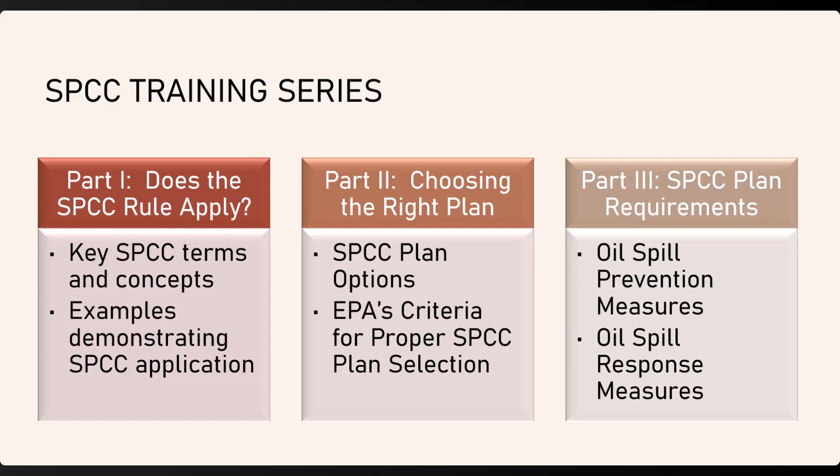It should be noted that much of the material presented here was taken from an EPA reference written for its inspectors. This document, which is referenced throughout this course, is free for download and is recommended for anyone needing periodic guidance to help ensure SPCC compliance.

In addition to this guidance, I've relied on my personal experience in developing SPCC plans for all types of facilities, including small businesses having a few oil containers, electric utilities with hundreds of SPCC regulated transformers, facilities with over 1 million gallons oil storage requiring, in addition to SPCC, a facility response plan, and inclusion of the SPCC requirements into EPA's integrated contingency plan model that can be used not only for SPCC plan compliance, but also compliance with several other programs, all written into one document.

So let's start this discussion with, what is the SPCC rule? SPCC is an Environmental Protection Agency program that is authorized by the Clean Water Act. The SPCC regulation is found specifically at Title 40 of the Code of Federal Regulations, Part 112, or simply 40 CFR Part 112. This regulation was initially published in 1973 and has been modified substantially since that time.

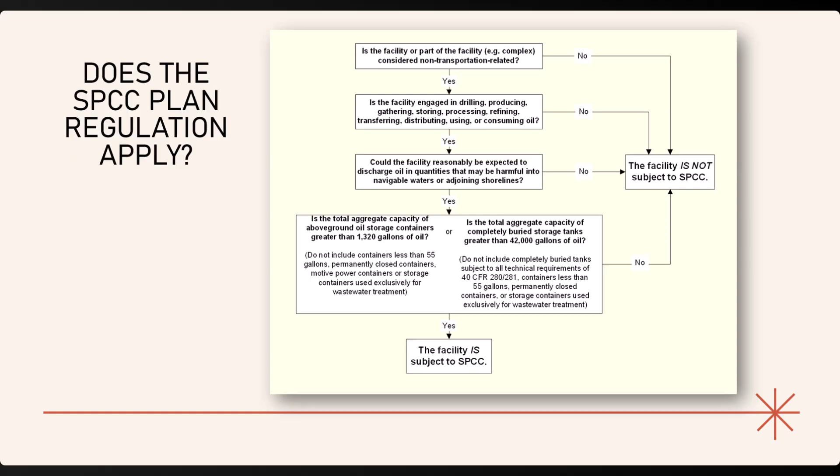Lastly, if you've made it this far, you must calculate how much oil you have to see if the facility exceeds the threshold quantities of 1,320 gallons of oil in above-ground containers or 42,000 gallons underground. If either of those quantities are exceeded, congratulations, it looks like you're regulated under SPCC.

Taking the EPA decision chart, you can distill this question of applicability into a single question as follows. Can the oil-containing non-transportation related facility that is involved in regulated activities with an oil capacity totaling more than 1,320 gallons for an above-ground tank or 42,000 gallons for underground, due to its location, reasonably be expected to discharge oil in harmful quantities to navigable waters or adjoining shorelines?

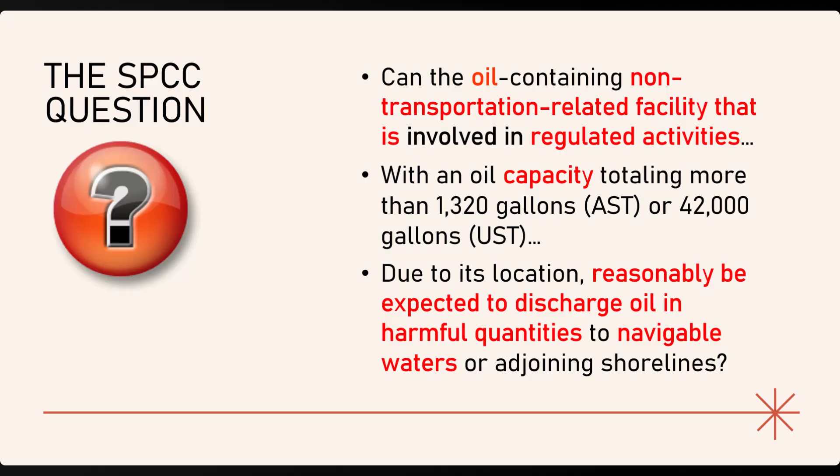The words highlighted in red are those words that are unique to SPCC and require an accurate explanation to answer the question. You simply cannot use Webster's Dictionary to interpret this question. The following sections will explain these terms and concepts and provide examples for clarity. This section will address the first two determinations from the EPA flowchart to help answer the question, is the facility non-transportation related and engaged in regulated activities?

The key terms and concepts to be covered in the slides that follow include the definition of oil, regulated activities, definition of a facility, including defining the facility boundaries, oil container and the different types of containers, the definition of harmful discharge of oil, and lastly, the definition of navigable water.

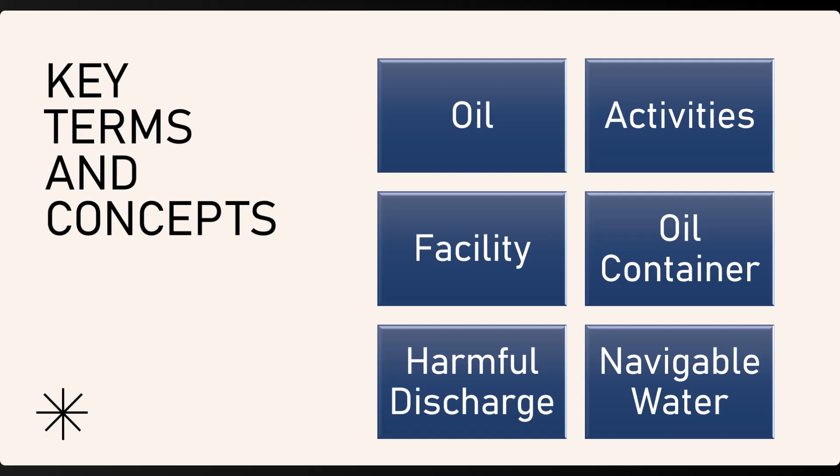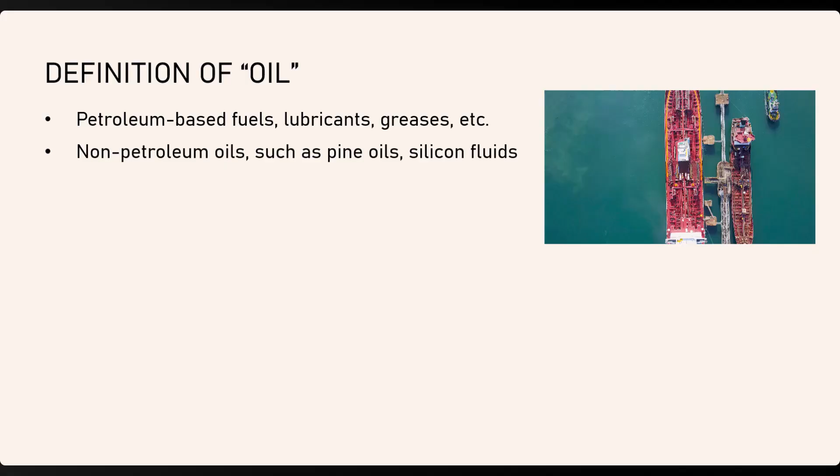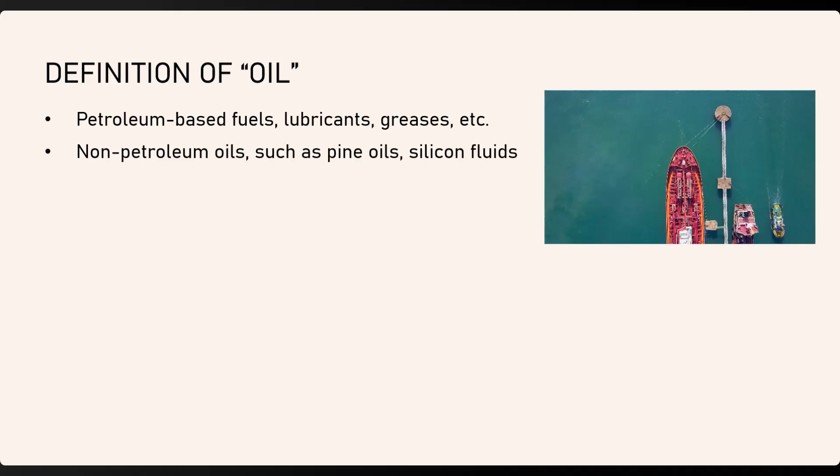Under SPCC, oil means oil of any kind or in any form. This definition includes what you would expect, namely petroleum-based oils such as diesel fuel, lubricants, and mineral oils. The rule also applies to asphalt derivatives such as emulsions, but not hot mix asphalt mixed with aggregate. The definition includes non-petroleum derived oils such as pine oils and silicon fluids. The definition includes synthetic fluids such as heat transfer fluids, hydraulic fluids, transmission fluids, and other synthetic oils.

In response to the Edible Oil Regulatory Reform Act of 1995, vegetable oils and animal fats were added to the definition. Examples of vegetable oils include corn oil, coconut oil, and peanut oil. Animal-derived oils include fish oil, lard, and tallow. Biodiesel and biodiesel blends are regulated.

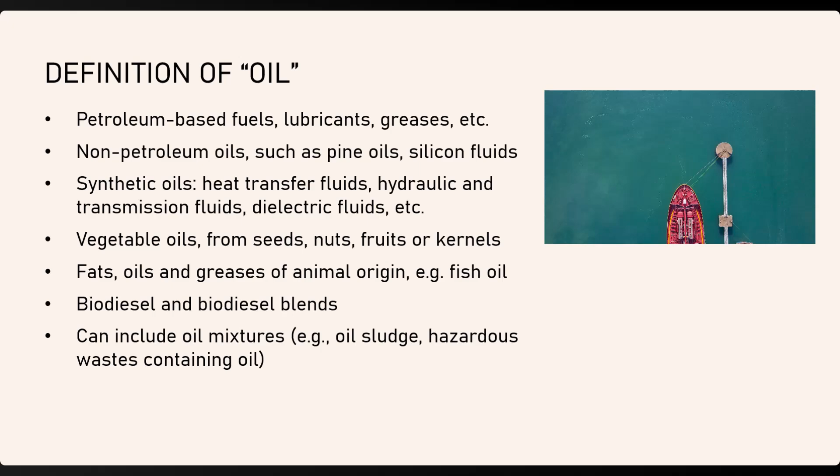Oil mixtures are included, such as oil and water or oil mixed with hazardous waste. If the mixture does not contain oil, it is not SPCC but could be regulated under a different EPA program. There is some nuance involved, so be careful. For example, natural gas and liquid petroleum gas is exempt from the definition. However, natural gas liquid condensate is covered by the rule. All this is to say, if you have a liquid related to any of these categories, you might be covered by SPCC. If in doubt, consult the EPA's SPCC Guidance Manual.

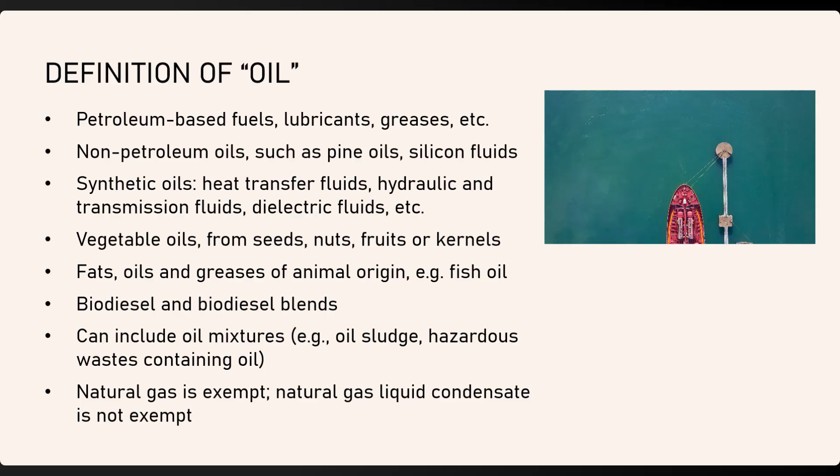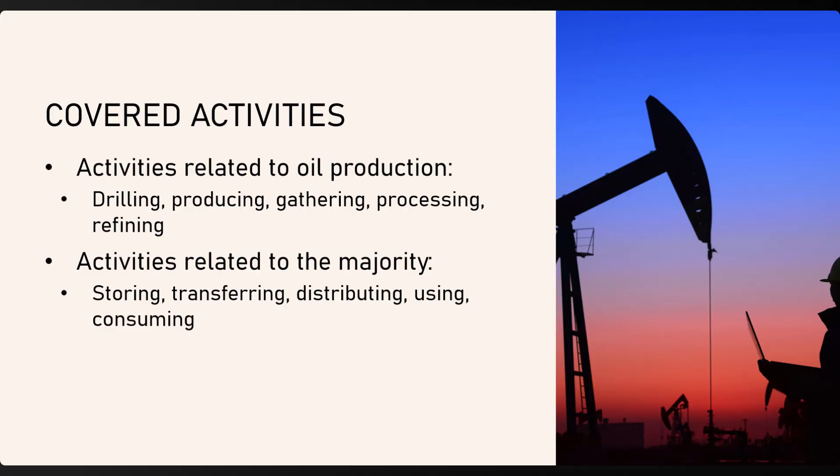The activities that trigger SPCC coverage are broken out here into two categories. First, there are those activities that relate to oil production and include such things as drilling, producing, gathering, processing, and refining. As you might guess, the ways in which the SPCC rules apply to oil production are numerous and complex. A thorough analysis of oil production and SPCC are beyond the scope of this course. Then there are those activities that apply to most facilities with oil. Those activities are storing, transferring, distributing, using, and consuming. There is not a lot of confusion involved here. If you have oil at your site, you are likely engaged in one or more of these activities.

Now let's discuss one of the most critical terms, facility. It's easy to think of a facility as being a site, like an address. That is not correct. A single site might have several facilities for SPCC determination. The definition of facility governs the overall applicability under SPCC. For example, how you define a facility determines how you calculate the amount of oil at that facility. Also, the location of a facility is used to judge whether you have the potential to discharge oil to a navigable water. One of the most important characteristics of a facility is its boundary.

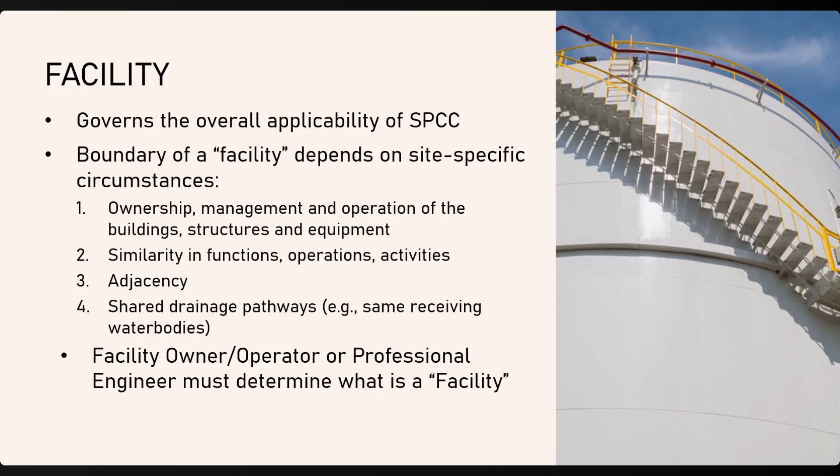The boundary or extent of a facility depends on site-specific circumstances. Factors that may be considered relevant in delineating the boundaries of a facility include, but are not limited to, the following: ownership, management, and operation of buildings, structures, and equipment, similarity in functions, operations, or activities, adjacency, and lastly, shared drainage pathways, that is, same receiving water bodies. The facility owner-operator, or the professional engineer acting on their behalf, must make a judgment as to what constitutes a facility. The next couple of slides illustrate this concept of setting the boundaries for a facility.

This boundary concept is best explained by example, one taken from EPA's guidance manual. Let's say a farmer has one central fueling location and 10 separate tracts of land. The central fueling location has several oil containers with an aggregate storage capacity of 5,000 U.S. gallons for diesel fuel, gasoline, and hydraulic lubrication oils. Each tract has one 1,000-gallon above-ground container of diesel fuel used for fueling only the equipment operated on the tract. The tracts are located such that the containers are each several miles from each other. Each tract produces various types of crops, and thus the equipment is operated seasonally according to the crop type and irrigation needs. What might be the determination of facility boundaries in this situation?

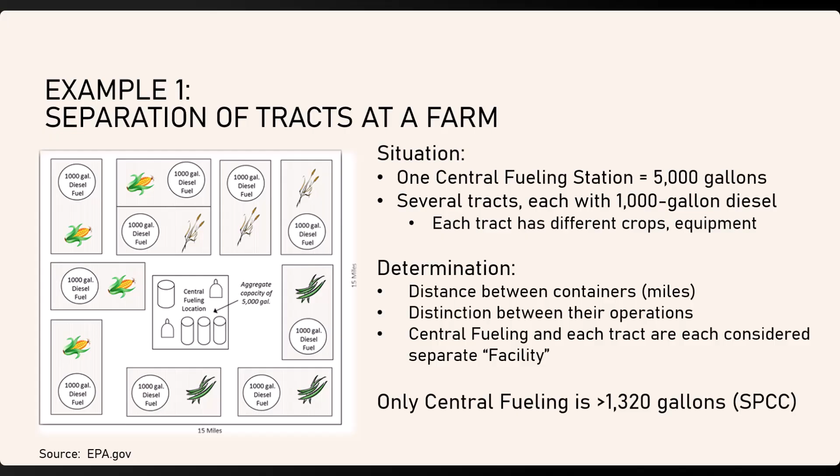Given the distance between containers and the clear distinction between the operations that they support, each tract and the central fueling location can be considered a separate facility for purposes of calculating oil storage capacity and determining the applicability of the SPCC rule. In this example, each tract does not individually meet the above-ground storage capacity threshold for applicability of the SPCC rule. That is, it doesn't exceed 1,320 gallons. Therefore, no SPCC plan is required for these tracts. Only the central fueling at 5,000 gallons exceeds the threshold. However, the farmer might choose to include the other diesel containers to provide oil prevention measures for the entire site.

Let's discuss just a few other examples because this concept of facility boundary is so important. Let's say you have first 10 drums of lube oil in a shed and a 1,000-gallon equipment above-ground tank used for maintenance, located 50 yards away. Is this a single boundary? It's likely. Why? Because they are located close together, that is, adjacent. They have the same owner, the same maintenance operation, and likely have similar drainage patterns.

Let's say you have equipment reservoirs in a powerhouse totaling 2,500 gallons aggregate. Single boundary? Likely. Again, because of the same location, same function, probably the same operators, in the same indoor drainage areas.

What about a 1,000-gallon diesel tank for equipment at a mine site, and then you have a 1,200-gallon diesel tank at another mine site a mile away? Is this a single boundary for a facility? Maybe, maybe not. Maybe because you have the same owners, the same function, and the same activity being performed. However, maybe not, because there is a large distance between them and they possibly impact different navigable waters.

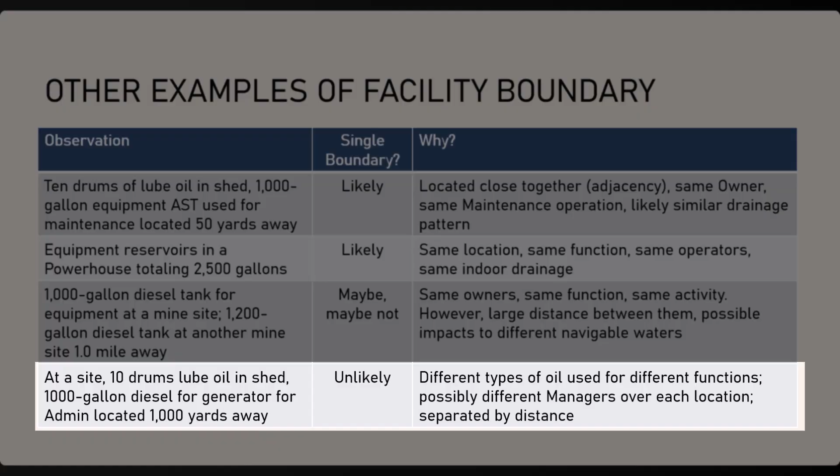A word of caution on defining facility boundaries. EPA says that an owner or operator may not characterize a facility boundary to avoid applicability of the rule. The issue of EPA looking at your boundaries might come up if you were to report an oil spill and EPA starts questioning why you do not have an SPCC plan. Examples of trying to avoid regulation might include the following.

You claim to have similar facilities that are separate, but they are actually located adjacent or in close proximity to one another. You determine that oils in the same location are not counted together because they are different products coming from different suppliers. Or finally, you claim that similar facilities drain to different stormwater areas on the site, but actually these areas eventually drain to the same drainage ditches and impact the same water body. These examples demonstrate the need for a qualified person to make the judgment as to what facilities are present.

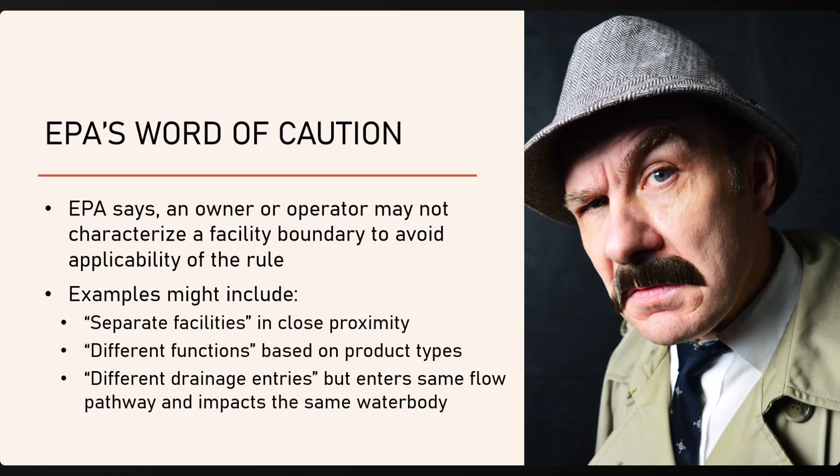Facilities regulated under 40 CFR Part 112 are divided into three categories: transportation-related facilities, non-transportation-related facilities, and complexes. A complex means a facility that has both transportation-related and non-transportation-related components and is therefore subject to more than one federal agency. A memorandum of understanding between EPA and the Department of Transportation, or DOT, clarifies the types of facilities, activities, equipment, and vessels that fall under the terms transportation-related onshore and offshore facilities and non-transportation-related onshore and offshore facilities.

DOT-regulated transportation facilities are exempt from SPCC. Examples of DOT-regulated facilities include highway vehicles and railroad cars used for oil transport, interstate and intrastate piping systems, and terminal facilities such as transfer hoses and loading arms used to transfer oil in bulk to vessels.

Examples of non-transportation related facilities that come under SPCC include fixed or mobile onshore and offshore facilities, facilities that use and store oil, loading racks, transfer hoses used to transfer oil in bulk to and from highway vehicles and railroad cars, and lastly, highway vehicles, railroad cars, and pipelines used to transfer oil exclusively within the confines of a non-transportation related facility, such as a fueling vehicle used exclusively at an airport.

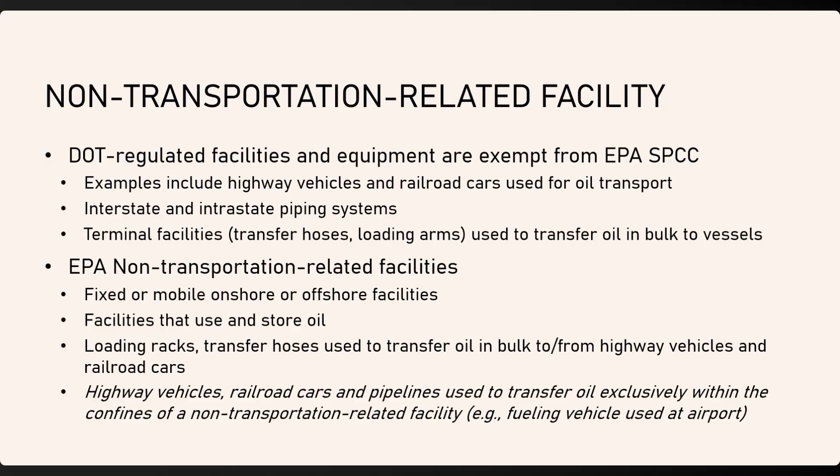Now that we've covered the steps to identify a facility, it's time to focus on how to sum up the capacity of oil being stored at that facility. The questions that must be answered are, is the total aggregate capacity of above-ground oil storage containers greater than 1,320 gallons of oil? Or is the total aggregate capacity of completely buried storage tanks greater than 42,000 gallons of oil?

The amount of oil at a facility is based on the capacity of oil storage containers. There are certain definitions that must be known in order to do this, along with SPCC rules on counting. This section will cover those terms and concepts.

Knowing whether a facility is regulated depends on the amount of oil in the oil storage containers. Under SPCC, there are two basic types of oil storage containers: bulk storage containers and oil-filled equipment. Bulk storage containers means any container used to store oil. These containers are used for purposes including but not limited to the storage of oil prior to use, while being used, or prior to further distribution in commerce. Examples of bulk oil storage are drums, totes, and tanks, either above ground or underground.

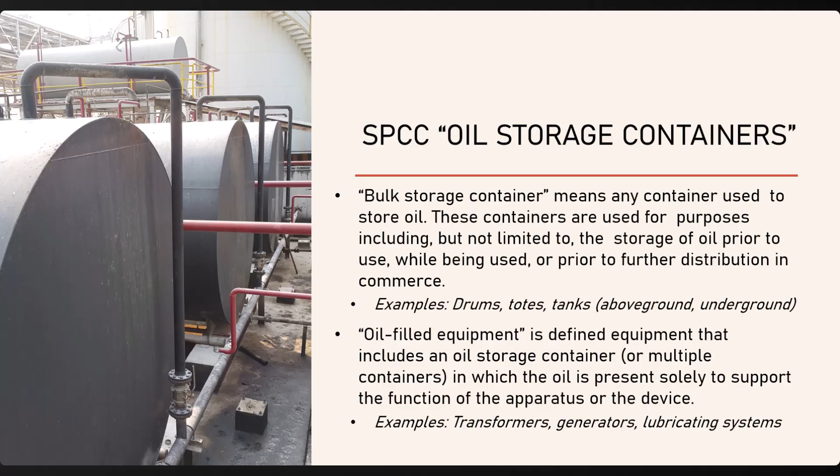If you have an underground tank at your facility, it's worth fully understanding how it might be regulated. SPCC regulates completely buried tanks. This means any container completely below grade and covered with earth, sand, gravel, asphalt, or other material. Containers in vaults, bunkered tanks, or partially buried tanks are considered above-ground storage containers for purposes of SPCC. This can be very significant because if a tank is not completely buried or in a vault, then the SPCC threshold drops to the above-ground tank regulated amount of 1,320 gallons rather than the 42,000 gallons amount that applies to completely buried tanks.

It should be noted that completely buried tanks that are subject to the federal or state UST rules are exempt from SPCC. That is why typical gas stations are not SPCC regulated. However, any underground tank that is not regulated by a federal or state rule is in turn subject to SPCC. An example of this is a buried tank that is less than 110 gallons capacity, the cutoff for UST regulation.

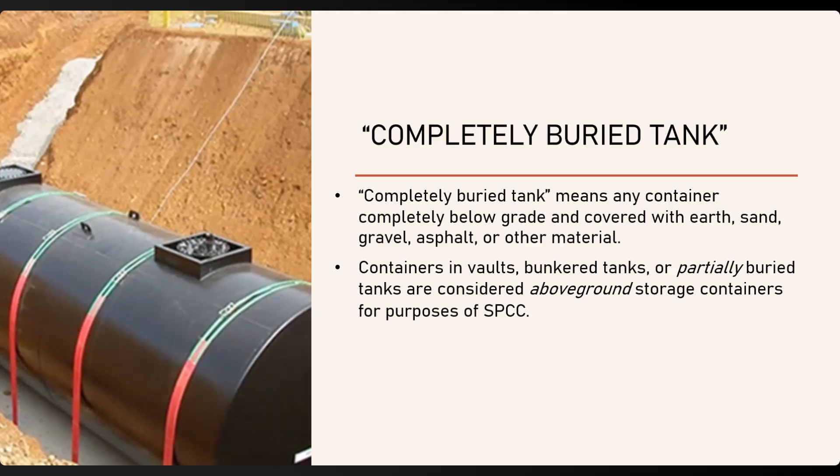Another example might be an emergency spill and overflow tank that is expeditiously emptied after use. Again, this tank is not regulated under the UST rules, and therefore it is subject to SPCC. The SPCC Guidance Manual has a list of completely buried tanks that are exempt from the UST rules and therefore might be considered for SPCC.

There are certain SPCC rules that govern how you count the oil at a particular facility. Number one, you need to identify what oil storage containers are present at a facility that are subject to SPCC. That is, they are not exempt or those containers are not permanently closed. Now, permanently closed means that the tank meets the conditions for closed as defined in the SPCC rule. It involves much more than just claiming that you are no longer using the tank, even if you empty that tank of its contents. Number two, consider every container with a shell capacity of 55 gallons or more.

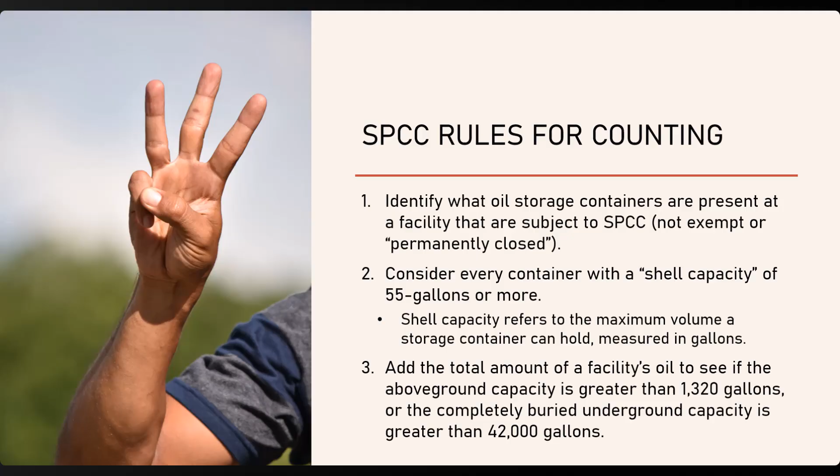Shell capacity refers to the maximum volume a storage container can hold, measured in gallons. In other words, don't count the amount in the container or typically kept in the container. Count the maximum, the shell capacity. Note that the SPCC guidance provides information on how a container's shell capacity can be re-rated to reduce the volume needed to be counted. Number three, add the total amount of the facility's oil to see if the above-ground capacity is greater than 1,320 gallons or the completely buried underground capacity is greater than 42,000 gallons.

So according to the rules, there are certain things that you don't have to count. First, containers less than 55 gallons do not have to be counted. As we talked about, permanently closed containers also do not have to be counted. Exempt are single-family residential heating oil tanks, and tanks that are completely buried and subject to federal or state underground storage tank rules are exempt. Equipment not owned or under the control of the site owner-operator does not have to be counted. An example of this would be a transformer with oil in it that's under the control of the local electric utility. And then lastly, containers used exclusively for wastewater treatment. If you have any questions about any of these examples of what not to count, I would refer to the EPA guidance for the regional inspectors.

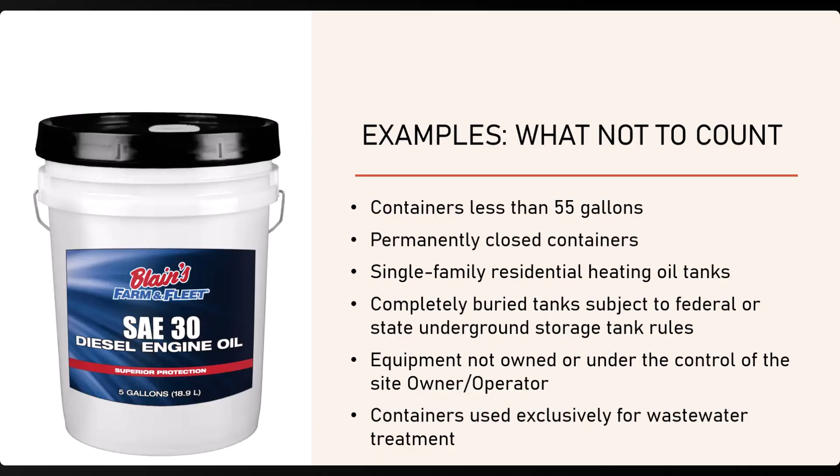So let's assume by now you've determined your SPCC regulated oil facilities at a site, you've identified all the oil containers and summed up their capacities, and you found that the oil capacities exceed the SPCC thresholds at one or more facilities. The last question to ask for each facility is the following. Is the facility reasonably expected to discharge oil in quantities that may be harmful to navigable waters or adjoining shorelines?

Let's discuss the term harmful discharge. It is reasonable to think that a harmful discharge to navigable water is an incident involving tens, if not hundreds of gallons. However, the SPCC definition of harmful discharge is something much different. Harmful discharge is defined in 40 CFR Part 110 as a discharge that causes a sheen or discoloration on the surface of the water or adjoining shorelines, causes a sludge or emulsion to be deposited beneath the surface of the water or upon adjoining shorelines, or violates an applicable water quality standard.

How much oil causes a sheen or a violation of an applicable water quality standard? Certainly not gallons, but more like quarts or even a few teaspoons. Yet, a harmful discharge requires immediate reporting to the National Response Center and most state agencies. Failure to report such a discharge may result in criminal sanctions under the Clean Water Act.

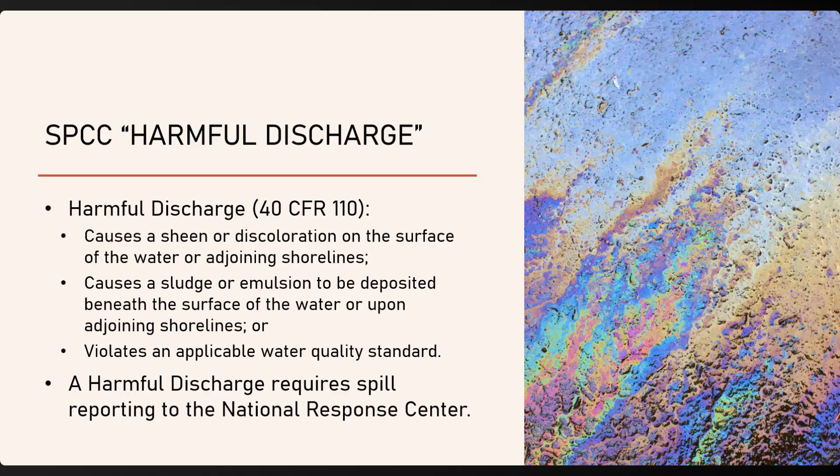You might be thinking, my boat leaves a sheen every time I start it up. The good news is that under 40 CFR Part 110, discharges of oil from a properly functioning boat engine are not determined harmful. Keep your boat in good repair and you should be okay.

The SPCC definition of navigable waters is very broad. Navigable water certainly does not mean you can float a boat on it. The term has been litigated over the years, but the current SPCC rule is based on the definition used way back in 1973. The term includes waters of the United States. This is a statutory term with broad scope encompassing rivers, lakes, bays, estuaries, and other waters that are navigable or have a direct connection to navigable waters.

It also includes wetlands adjacent to these waters with a continuous surface connection. It can also include intrastate lakes and ponds that are relatively permanent, standing, or continuously flowing. Currently, the situation is so broad that if a topographic map shows a water body, then you are reasonably safe to assume that that water body is considered a navigable water.

However, this might change. In November 2025, the EPA announced a proposed rule that would clarify the definition of waters of the United States. This rule, if passed, could further narrow or clarify the scope regarding wetlands and tributaries. So stay tuned on that.

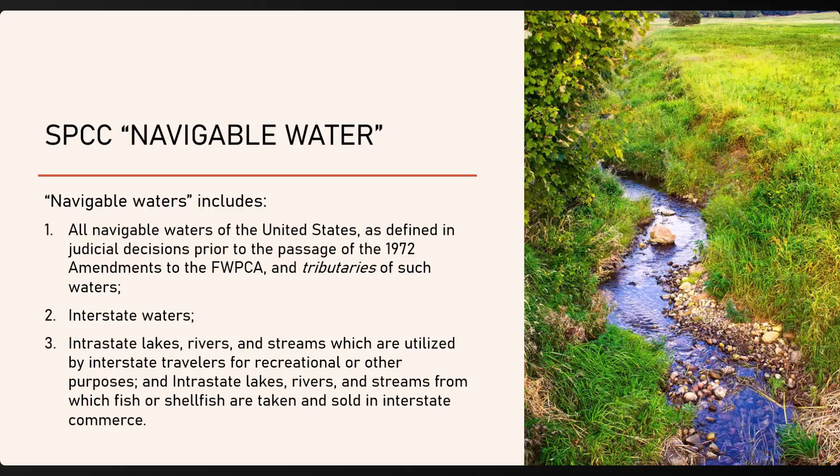So now let's consider the SPCC rules for a reasonable expectation of a harmful discharge. The rule does not define what can reasonably be expected. The owner or operator of each facility must determine the potential for a discharge from their facility. This determination must be based solely upon the consideration of geographical and locational aspects of the facility. This means that in making the determination, you should consider the location of the facility in relation to a stream, ditch, gully, or storm sewer.

You should also consider the volume of the material likely to be spilled and drainage patterns and soil conditions. What you cannot consider is constructed features such as dikes, secondary containment, or other man-made structures that prevent, contain, or restrain a discharge. Incredibly, the things that are most relied on to contain an oil spill are not a part of the spill impact determination.

However, you should consider man-made structures that facilitate a discharge, such as stormwater or sanitary sewer conduits, even if they lead to a publicly owned treatment works before reaching a navigable water. EPA's rationale for all this is that man-made structures can fail to contain oil, even treatment plants.

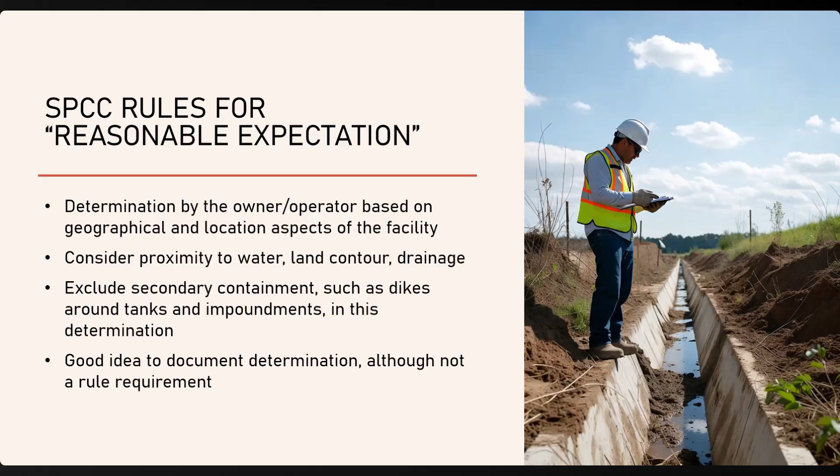Let's discuss good sources of geographic information. Because the reasonably expected determination relies heavily on geographic factors, it's good to be aware of what information is available online and elsewhere. Google Earth is a free online tool that can be used to obtain detailed aerial imagery and maps. The Fish and Wildlife Service has an overlay for Google Earth that can be used to highlight streams, ponds, lakes, and other water bodies.

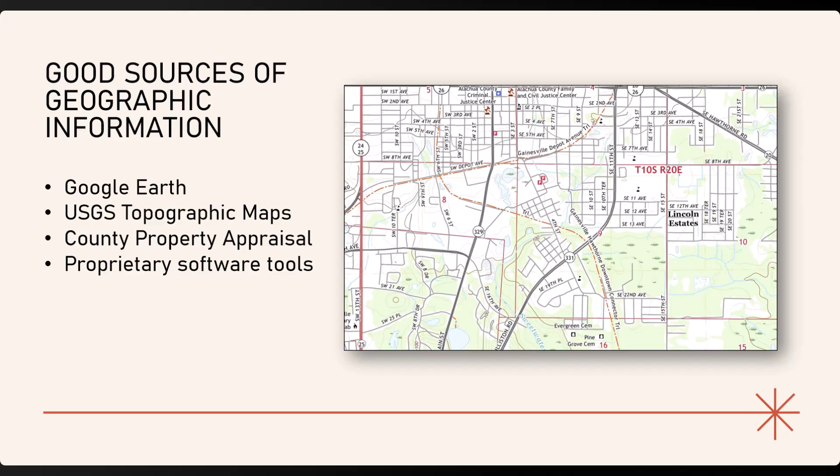The USGS Topographic Maps offers a free online service where you can obtain topographic maps that are historical and current. These maps show contours that provide insight as to which direction the runoff is taking and where the water bodies are located. Many of the county property appraisal departments offer a variety of maps that can provide details on parcels in the county along with current identification of structures. Lastly, there are proprietary software tools that can be used for SPCC determination purposes.

Returning to the question that was asked earlier in this presentation, can the oil-containing non-transportation related facility that is involved in regulated activities with an oil capacity totaling more than 1,320 gallons AST or 42,000 gallons UST, due to its location, reasonably be expected to discharge oil in harmful quantities to navigable waters or adjoining shorelines?

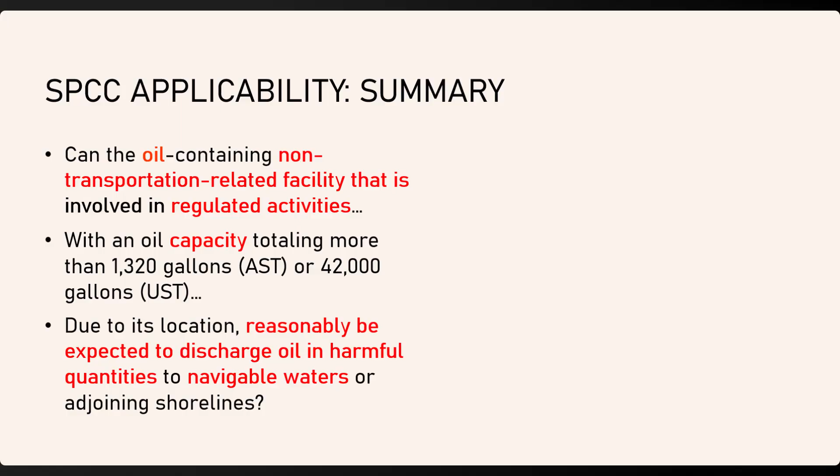If, based on a good understanding of the terms and concepts highlighted in this question, the answer is yes, then you need to develop and implement an SPCC plan. However, if the answer is no, given the complexities involved, it's a good idea to have documentation of how that decision was made in case questions are asked in the future.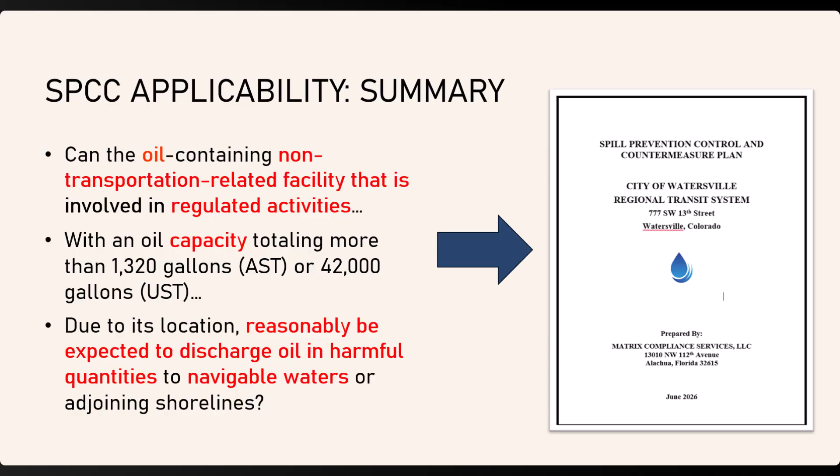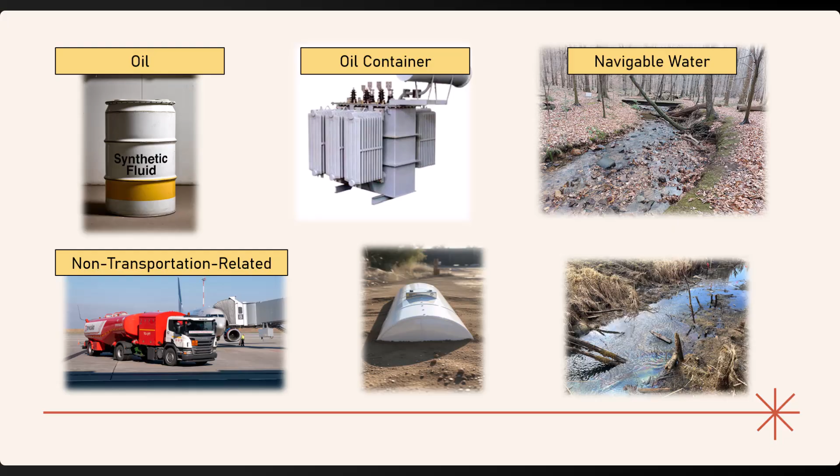I'll leave this discussion of applicability with a quick review. According to the SPCC rule, this is oil, this is an oil container, this is likely a navigable water, this is considered non-transportation related activity at an airport.

This is an above-ground oil storage tank. And this is likely an oil release that requires immediate reporting to the National Response Center. If you are tracking on all these definitions, then you are now equipped to consider how the SPCC rule applies to your facility.

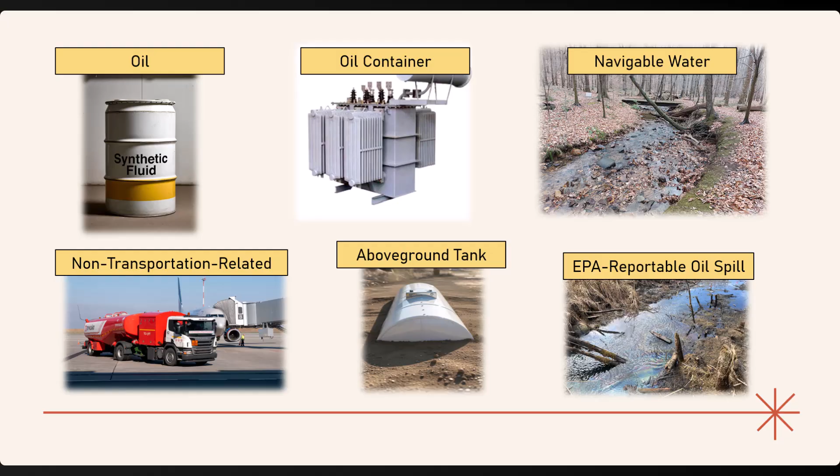To finish out this course, I want to briefly discuss some of the SPCC options available and the criteria that triggers the specific plan. A more thorough discussion of this subject will be presented in the next video, part 2 of this series. The previous slides described the full SPCC plan required by 40 CFR 112 that, among other things, requires that specified elements be included in the plan and that it is certified by a professional engineer.

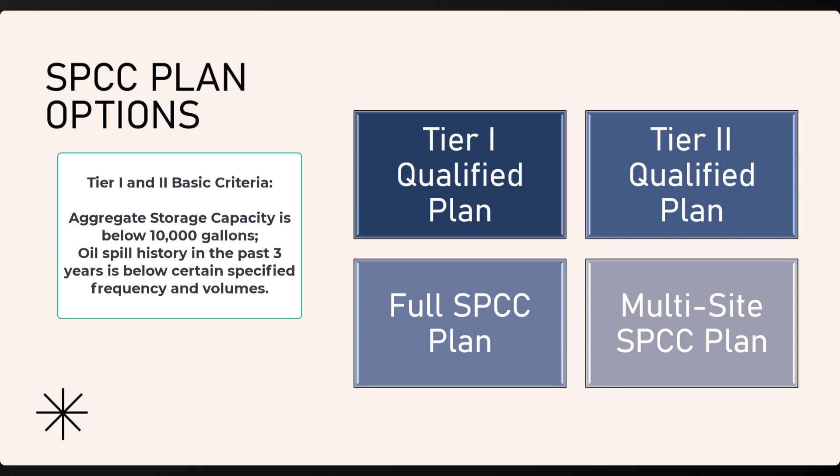Changes to the SPCC rule allowed for tiered versions of the full plan based on storage capacity, container size, and spill history. A notable feature of the Tier 1 and Tier 2 plans is that the owner-operator can self-certify rather than having to use a PE. The applicable threshold for qualified facilities, meaning qualified for either Tier 1 or Tier 2, is the following. The aggregate oil storage capacity is less than 10,000 gallons. The spill history over the last 3 years is below certain limits, such as less than two 42-gallon or more spills occurring within a 12-month period.

The difference between a Tier 1 and Tier 2 is that the Tier 2 facility has an individual container over 5,000 gallons capacity. For the Tier 1 plan, EPA has prepared a template that can be filled out and signed. The Tier 2 plan requires all of the elements of a full plan. However, both plans allow self-certification by a knowledgeable owner-operator instead of a PE. Here's the catch. The person signing must be familiar with the SPCC requirements enough to know that the plan is adequate to address the facility's spill risk.

The full plan has been discussed and is the one most common. However, there is also a plan referred to as the multi-site SPCC plan. This plan format is useful where numerous facilities are similar in function and spill risk. A general plan can be written to cover all the facilities with site-specific information such as location and site oil capacities placed in appendices. This plan is most useful for an electric utility with dozens or even hundreds of substations that can benefit from a single plan instead of a plan written for each substation.